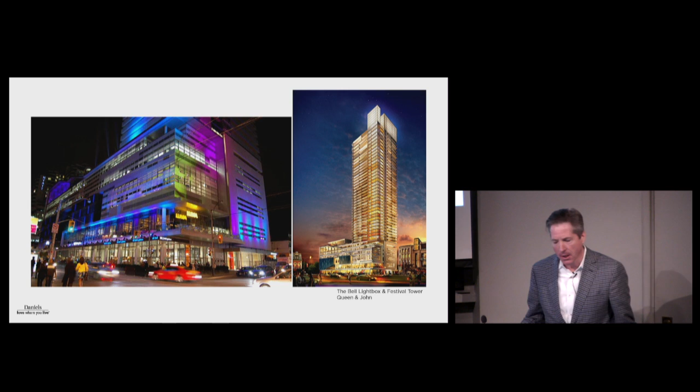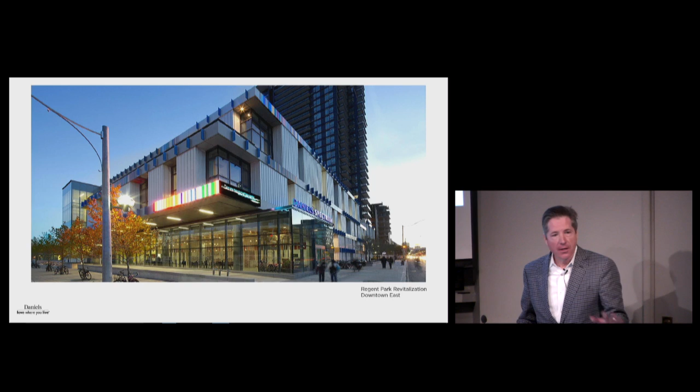But we're not here to talk about this today. We're here to talk about a very unique community that is actually under construction today. And we call it Daniels Waterfront City of the Arts.

As Peter mentioned earlier, we are adept and desirous of wanting to form relationships with Toronto's arts community, and that arts community can span a broad spectrum. As evidenced by TIFF Bell Lightbox being the film aspect, Daniels Spectrum, which I talked about, has a whole host of different arts and cultural organizations, a Center for Social Innovation. It's managed by Toronto's Artscape, which those of you who know Artscape know is the City of Toronto's arts provider - an amazing organization. So just to fast forward, we've done a number of significant communities in Toronto.

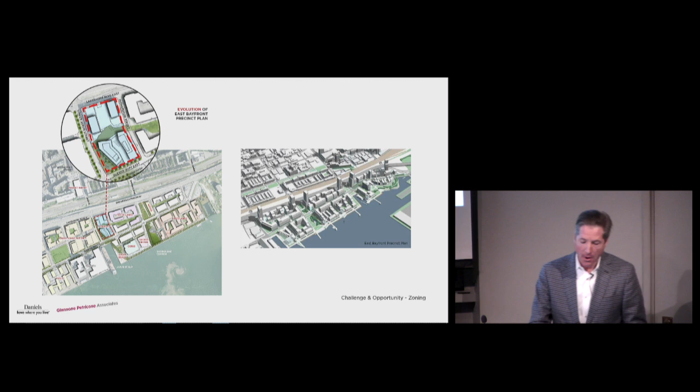Waterfront Toronto was charged with revitalizing the waterfront, and I think they've done an incredible job in terms of master planning, public engagement, and the amenity spaces they've created. This was on every single developer's radar, and we were fortunate enough to put our hands on 2 blocks, which you can see up here in the corner - a city block approximately 2.8 acres in size. To the north is Lakeshore Boulevard, to the south Queens Quay, Lower Jarvis to the west, and Richardson, a minor collector street. As you can see, it's a gateway to the East Bayfront community.

That's what was really interesting. Some of the younger audience members may know this as the former House of Government nightclub. So we were the people that took down the Government. What can I say - my kids were not thrilled, but you know.

It was interesting because the City of Toronto adopted a zoning bylaw - a lot of land consolidation led to the creation of Waterfront Toronto. The city created a zoning bylaw on the precinct plan around 2006, and that seemingly overnight granted what you see here today, save and except for our parcel. This was Waterfront Toronto's vision of the precinct plan - pretty cool and nifty stuff, but what does Waterfront Toronto know about developing, marketing units, selling, and talking about marketable density and different uses? So not surprisingly, everybody was upset. Some people thought the location of some buildings were improperly sited up against the Gardiner Expressway, a very difficult area to sell. Some landowners were very concerned about not enough density - go figure, overnight they get all this windfall - and so everybody appealed this to the board.

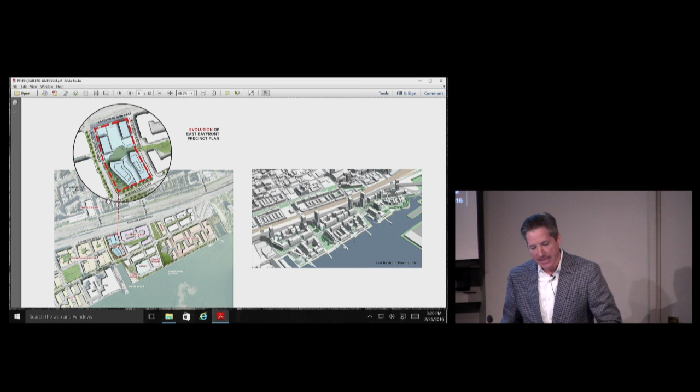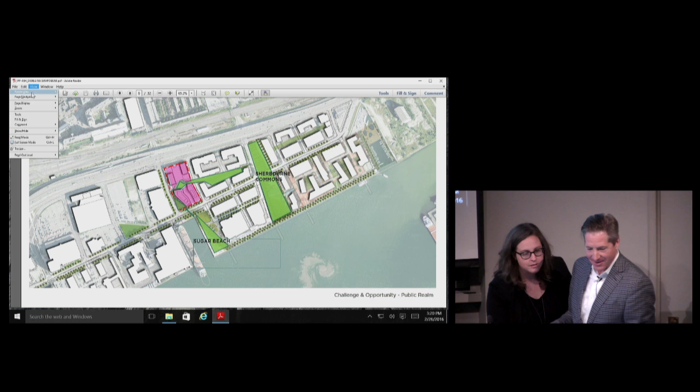Now I should clarify a couple of interesting notes. Those are our friends at Great Gulf. Great Gulf actually had land use approvals, and the reason they had them was because they did a purchase from Waterfront Toronto - in that case, Waterfront was a vendor. Ours was the first private sector acquisition, and that makes it notably different - a private sector purchase, where we then step into the position of these people who are clearly at the board.

So in the pink is our piece of land. As Peter alluded to in his presentation on the work he's done with Pier 27, which is just over here on this side - Redpath, a very significant 50-plus year industrial landowner, an existing operation with no intention to go anywhere. Go figure the business economics of tankers coming up through the St. Lawrence and coming in to unload cargo here. It's a historical operation, but they have no intention to leave, and it's a very significant footprint with a whole bunch of characterized compatibility concerns.

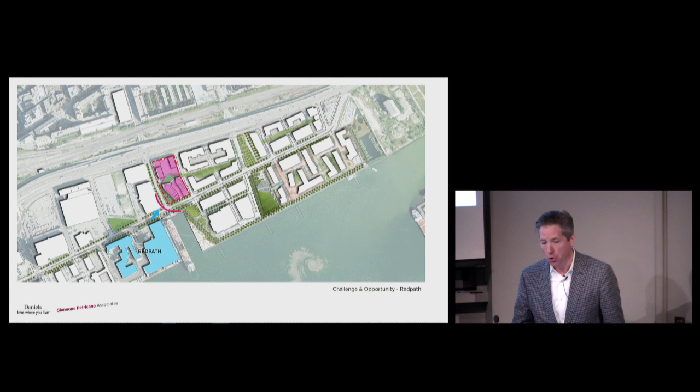So Redpath was taking everybody to the board. I don't need to tell you obviously the impact and how close our site is to them - they were a significant player in this whole dialogue. Obviously Waterfront Toronto were significant players, and the City of Toronto were very significant players. So to cut a very long story short, it took us probably about 2 to 2.5 years to negotiate with all the different stakeholders.

I think a notable issue was I had been traveling and had gone to Cape Town, South Africa, and was absolutely awestruck about their waterfront and how dynamic it is, with all the different uses that seemingly cohabitate there. You have a high-end hotel, where my daughter and I are actually staying, beautiful nightlife, restaurants, retail, residential, and not a minute's walk from this hotel, there's a dry dock with a massive tanker getting sandblasted. I won't speak to all the MOE criteria around that, but how fascinating from a pedestrian perspective to be able to see all these things happening.

So we came back and it just struck me, and our company has always had a desire to speak for ourselves. We don't necessarily do a lot of speaking through lawyers and planners and other experts. We have a really good sense about what we want to do, and we can sit with somebody and say, here is what we want to do, here's why we think it's a very good idea, what are the concerns, let's get into a dialogue. That's really what it's about.

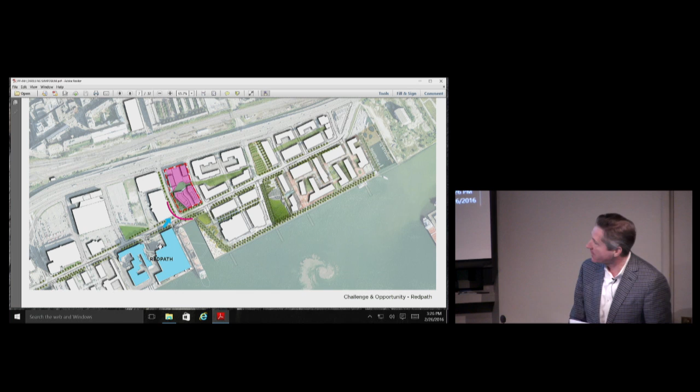Well, I mean, needless to say, I don't need this mic, right? Needless to say, we were delighted to be asked to be part of this venture.

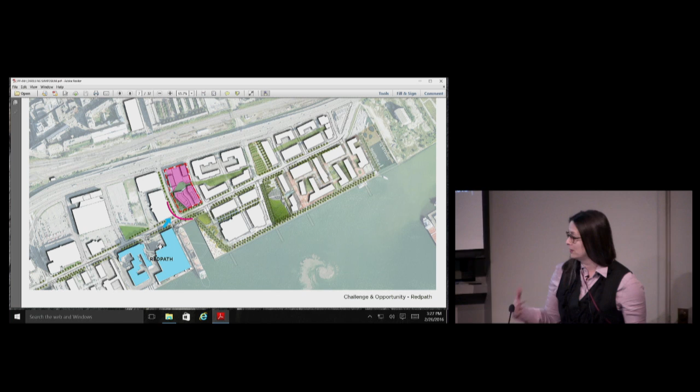We were one of a team, as Neil mentioned. Daniels was long into this process before we came on board and put together a team of designers and actual experts, including Raw to design the South Block, Claude Cormier for the landscape architecture, Ken Greenberg as a consultant to the entire urban strategy, and other consultants such as Novus, who put all of our schemes through a rigorous performance modeling program that significantly shaped our work, as you'll see in my discussion.

These were... untalked slides, Pina, sorry. Was it not? These were still Neil's slides that prompted you. You needed no prompting anyway to discuss those.

So when we were approached to work on this project and specifically to design the North Block, it actually is impossible to talk about the North Block without talking about the South, the extension of Sugar Beach, the inter-block connections, et cetera.

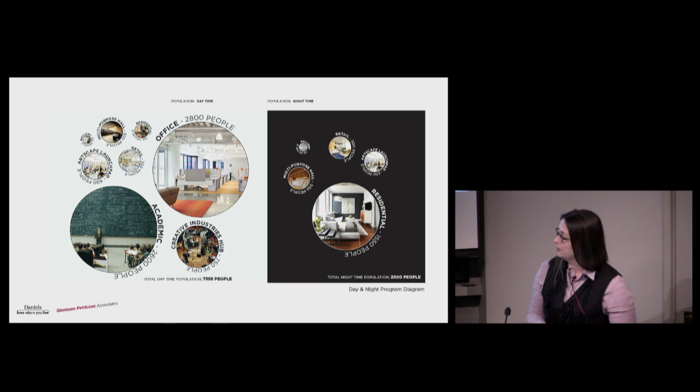You will see that this really is a project that is a definer, I hope, of intense mixed use, or what we call in the office true mixed use. We've been involved in a lot of mixed use projects, and often mixed use is quite limited to commercial at the base and residential above. We have been involved in other projects that are more daring, but maybe none as daring as this.

I say daring because when you are actually committed to a true mixed use that isn't just the slogan live, work, play, it's actually live, work, play, learn in this case, there is a whole reverberation of metrics and even mathematics that goes through the development model. So we were delighted to be part of this, and as architects really challenged, as many people in the audience who are architects or students of architecture know, usually the most innovative designs come from limitations or from such challenges.

The slide that's up right now is one we put together in our first presentation to the Waterfront Toronto Design Review panel, where we started to count, literally, the number of people that would be here during the day versus the number of people during night. A big problem that affects various pockets and neighborhoods in the city of Toronto, but maybe none like the waterfront, and specifically east of Yonge Street neighborhood, suffers from being this kind of nocturnal city or nocturnal neighborhood.

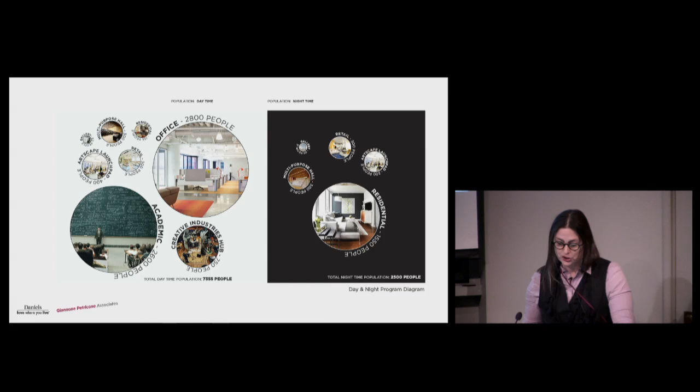It's really only through this kind of combination of programs that we could get these people here. And we like to think that it's in design and in the architecture that really allows a kind of urban and mostly social intensification to happen.

So when Peter says housing makes cities, I think that can be true for Toronto. I think it can be true perhaps only if we consider housing as an operation that is opportunistic, right? Opportunistic in a way that is a kind of excuse, maybe, to striate spaces at the ground.

So we are going to show you two high-rise residential buildings here, but with an intensity at grade that allows for a kind of social infrastructure that we think is key. We happen to be obsessed with this notion in our office, and we do many projects in the city that are what we call public interiors through restaurants and bars and hotels.

But this constant preoccupation of what it is like to live, and when we're talking about standards of dwelling, it's impossible to think of standards of dwelling without thinking of standards of living.

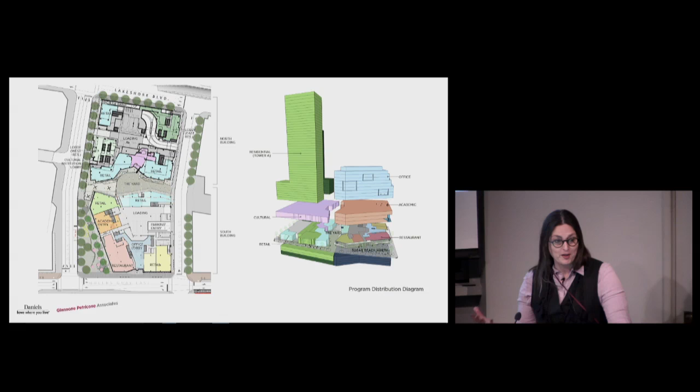And so this diagram here, just to be specific: this is the entire block. This is Queen's Quay. This is the south block, which is entirely commercial office and cultural program and retail program. This is the north block that we're talking about, and what we defined as the yard, which I'll get to in a minute. And this is just an exploded massing of the different programs that we have on this site.

On the south, there is a big academic program and the office component. I think what's here is the Artscape launch pad on this side. As Neil mentioned, there was an obligation not to have any residential units on this side.

On the north, then, it basically carried the load, so to speak, of residential units. There is another cultural, actually education, program here. And at the base we have a different scale of retail and a large collecting lobby for the institution that sits above.

And all in the green are the connections down to the street through the residential buildings.

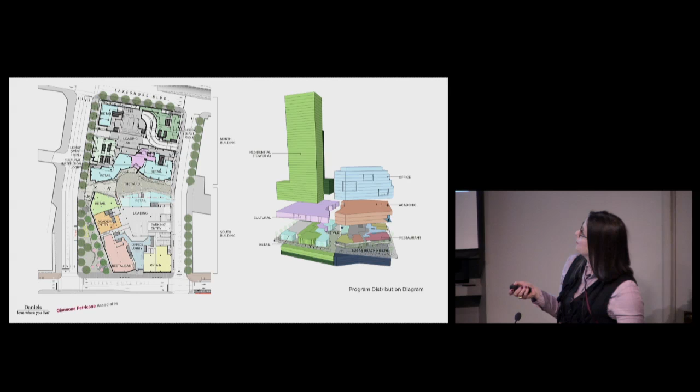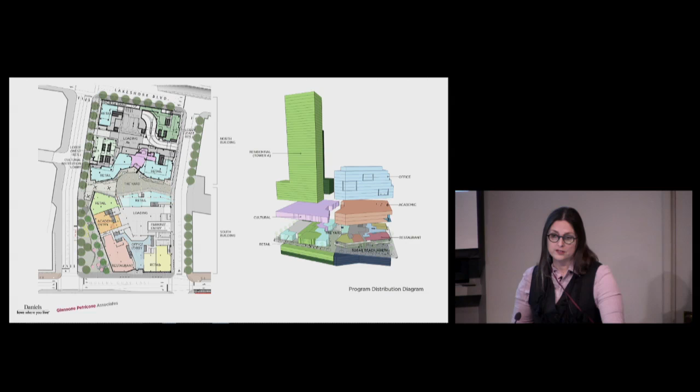This idea of a kind of conviviality of these programs, but not just the programs, but basically what the waterfront—and how it is currently striated with the still the vestige of its industrial use, mostly through Redpath—is a kind of richness, a texture that we really wanted to leverage and be part of, and almost heighten rather than take it as a kind of confrontation.

So just very quickly, there were the aspects that are shaping—before I get into these diagrams, coming to the waterfront, this side of Yonge Street already had these cultural programs that had emerged. There was the Corus Building, the George Brown College Building, there's that think tank, what is it called?

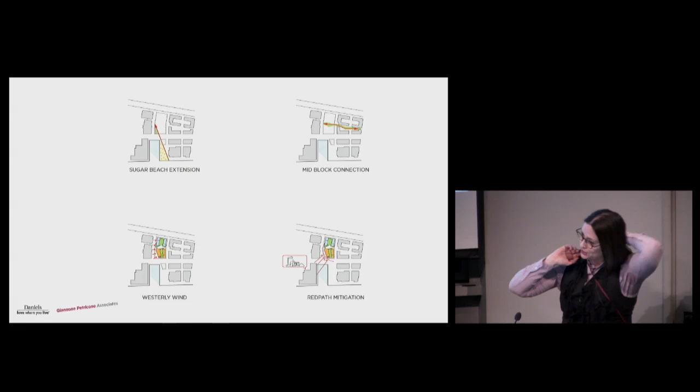Do you remember, Duncan? The Innovation Center that's on the boards. And so there are already these kind of magnets of cultural program existing in the neighborhood, and this actually works very well to tap into that.

Two things that we discovered as architects coming to this site. One is that the waterfront really does suffer to some extent with scale—potentially a kind of middle and large scale being tackled first, as it should be, but that fine-grain scale is yet to come, and it's ripe for that scale to come and intervene.

The second thing is that there is a microclimate—maybe not on a day like today where we have a bit of sun, but on a day like yesterday at the waterfront, it's quite inhospitable. As a pedestrian, especially even a cyclist, you could get blown off your bike in certain instances.

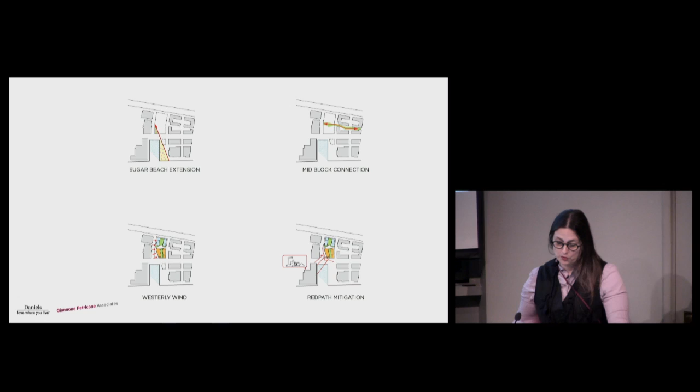So these two aspects of this particular site, and three when we include the nodes of culture, were really what drove our scheme. And actually, these diagrams explicitly show the big moves that shaped the project.

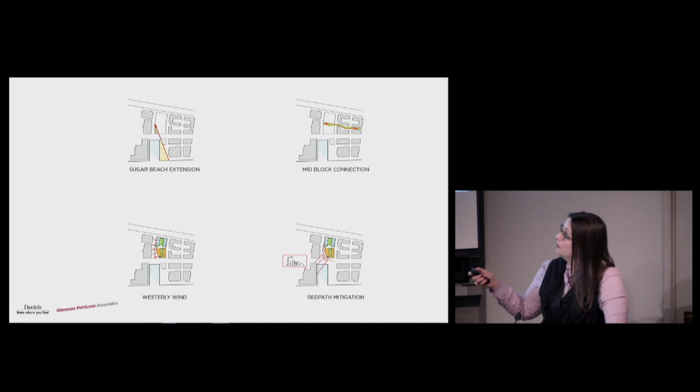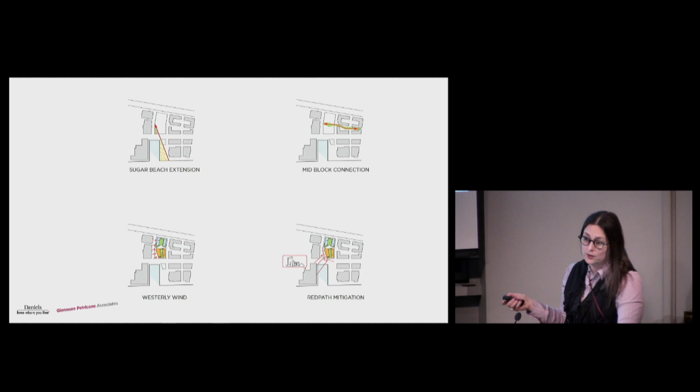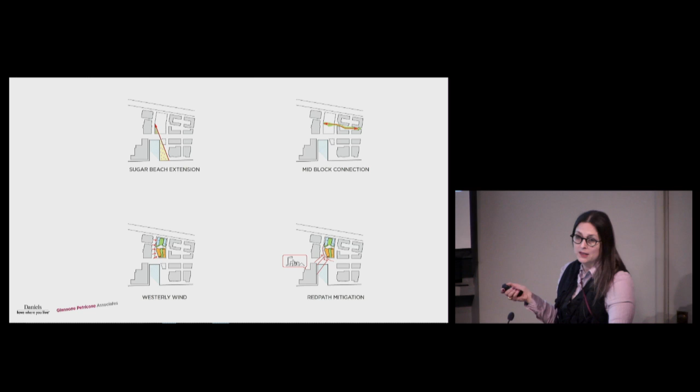So the first was the extension of Sugar Beach—Claude Cormier's intervention becomes quite literally an extension. The second, and actually quite significant for us, is the mid-block connection that was already programmed within the precinct plan. The westerly winds, which are already formidable, are then exacerbated by putting a 43-story tower in its path. And lastly, but not least, the proximity to Redpath and the mitigation we needed to accommodate there.

So again, these are challenges that we relish. We relish them because they provide resistance, frankly, to the work and to the design process.

So the first gesture is really to identify what we call the urban order versus the creative order—an idea that was necessary to develop a public space, but a textured space, textured insofar as its uses and occupation, first of all day and night, but also 12 months of the year. This is something Ken Greenberg was championing for this project with the city, and it was amazing.

One of the questions for the symposium really hits at these kinds of processes, where you can get the attention of decision makers by saying, if we do this as a kind of design gesture that may not fit within the official plan, we could get people here 12 months of the year, or we could have people here all day long—more people here during the day than at night.

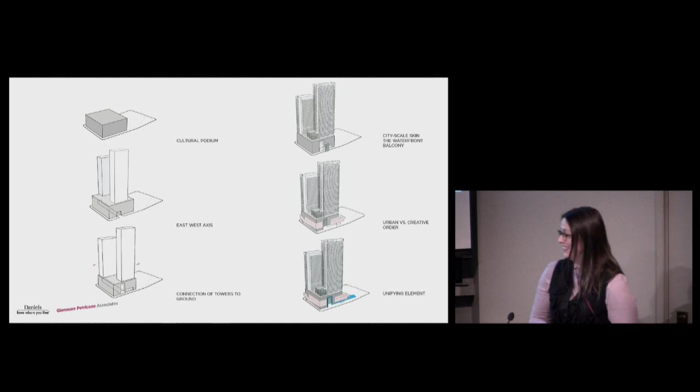We started with this cultural podium, as we call it, that was invested with programs that put so much pressure in our design on the metrics of the residential component. So when I say the residential component on the North Block is doing the heavy lifting, it meant that direction came down from Daniels one day to say, you know that super cool shape you made? Well, there's a directive to actually create these towers to be as simple, and the key word was efficient, as possible. Efficient in its floor plates and the location and size of core and how it connected with the podium, but also no jogs, no innies and outies, no pleats, no nothing.

We would come back and say, oh yes, absolutely, we understand, and then we would go like maybe a little shift, and they'd come back and slap our hand and say, no, you didn't hear us, we want it just rectangular. We appreciated so much that they were still letting us do this, because we understood, it took a couple of meetings, but we understood that for all of those people living in these towers to have an exceptional amenity in their immediate proximity, their dwelling life needed to include this. And the only way that could happen is with the numbers working, and the affordability of these units was key.

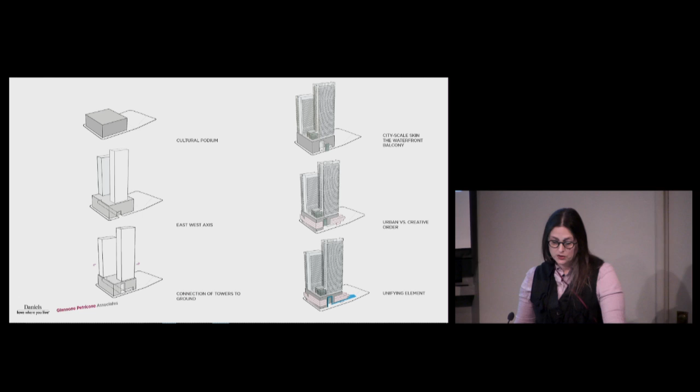So the scheme developed using the strategy of this cultural podium with the urban order and creative order towards the yard, and the staggered towers. We staggered the towers in order to create certain views and a kind of collapsing of views, and pulled the service corridor away from Lakeshore. There was always an intention that in the future, we hope in the near future, the Gardiner will come down, and we imagined a facade that would still be robust and appropriate when that happens.

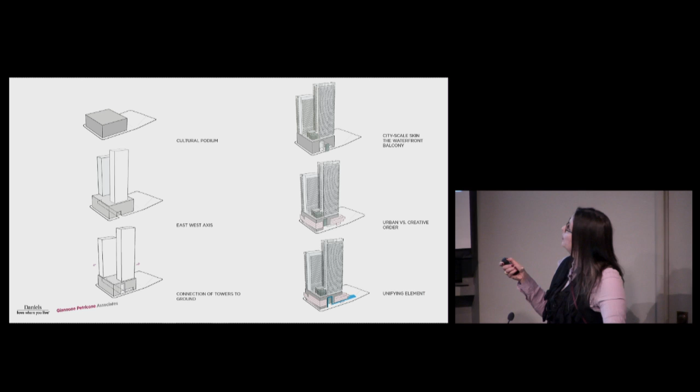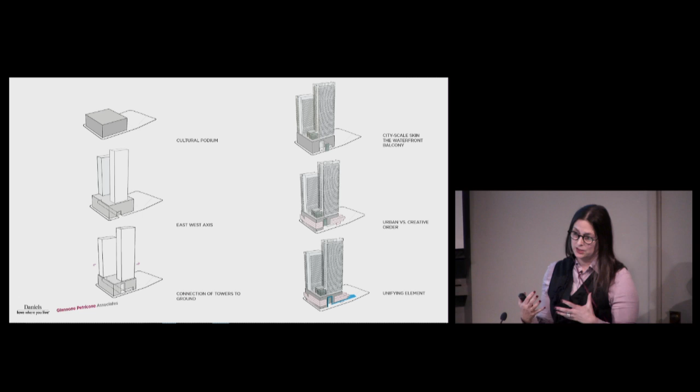The big gesture really happened at the urban scale, or city scale, where we had these rectilinear volumes, we had balconies, and it was at the level of the balcony that we provided expression. We challenged ourselves to come up with the most inexpensive way of modeling this rectilinear form, and we developed a frit pattern which unabashedly, in a two-dimensional way, tried to create a kind of optical illusion of movement and depth, but really it's just a ceramic frit on glass balconies.

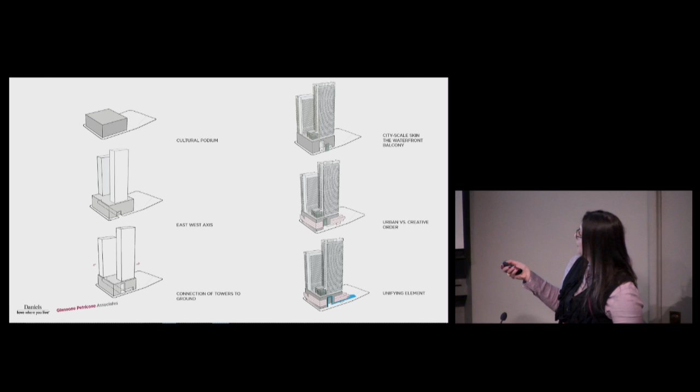This last element, which we call the unifying element, is a big canopy, that was first a result of putting the building through a performance process. The mitigation factors with Redpath really required that we dealt with not just noise but odor, and the building really works hard to use basic technologies to respond to those mitigating factors, rather than having to build a wall, as Peter did against Redpath. Again, with the hope of this idea of conviviality, much like the South African example, that Redpath and that industrial aspect of the site continues, and this is just layered on.

So the canopy is actually the greatest contributor to wind mitigation, and the tests included, as a pedestrian, what are the degrees of comfort? There are many kind of actual rankings they give in different spots of the site, and we were intent on providing the maximum comfort as a pedestrian in order for the space to be used, even on days like today.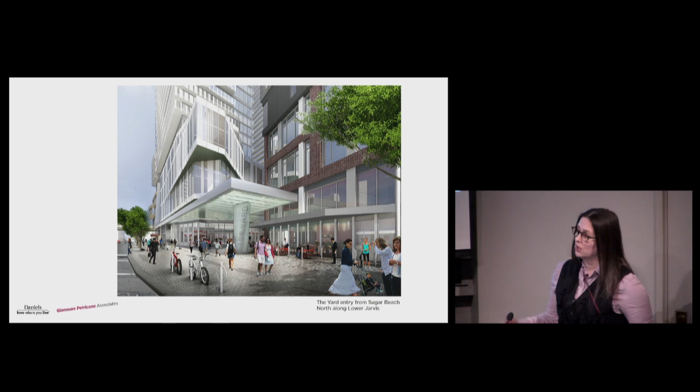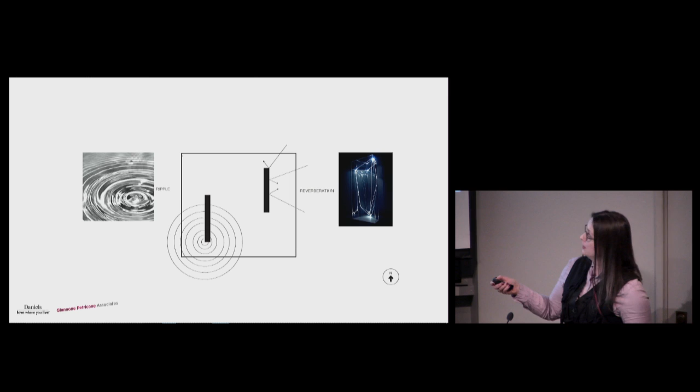So the strategy was to create, as I said, the ceramic frit. The westerly tower created a ripple, the easterly tower was reverberation. We say it's ripple like water, but really in the office we were so battling and wrestling with this issue of sound mitigation, the STC ratings, et cetera, that for us it's noise, waves, and reverberations, not water.

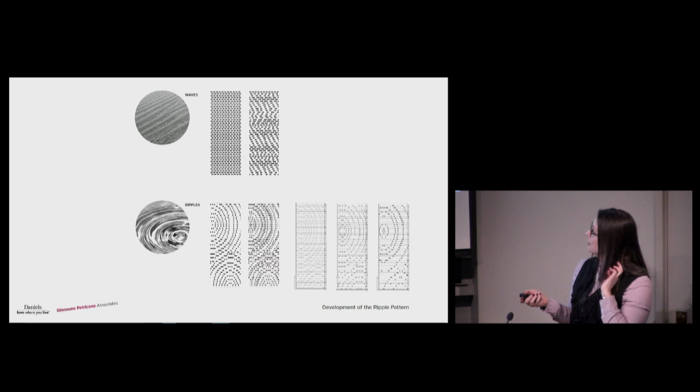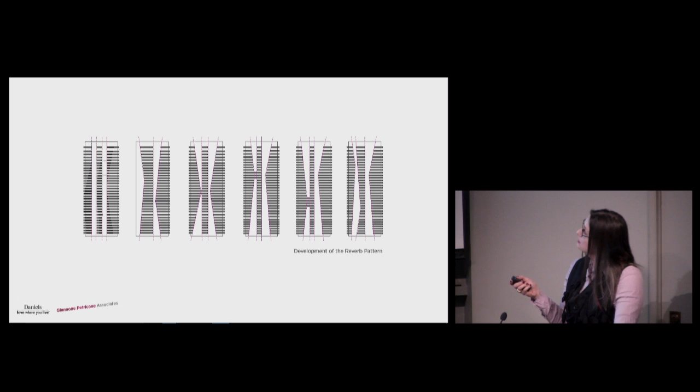And the frit, the studies of frit were exhaustive, and the layering, keeping in mind the price point, we developed a strategy of only 5 patterns, but in their recombination got a kind of depth and complexity. Similarly with the reverberation side, the east tower, these were not expressed as glass balconies, but patterned perforated metal balconies, which are actually the only thing cheaper than glass balconies. As the unit layouts developed, we developed this with gaps in the balconies, and ended up with 3 very basic types of balconies.

The balcony is maybe the first, I'd say preoccupation politely, but really a kind of obsession in the domestic project for us, and how it participates or extends that domestic unit. These are the three types that ultimately inform this project: the ceramic fritted bypass balcony, the perforated metal panel bypass balcony, and the clear glass panel, which is the most basic we could have.

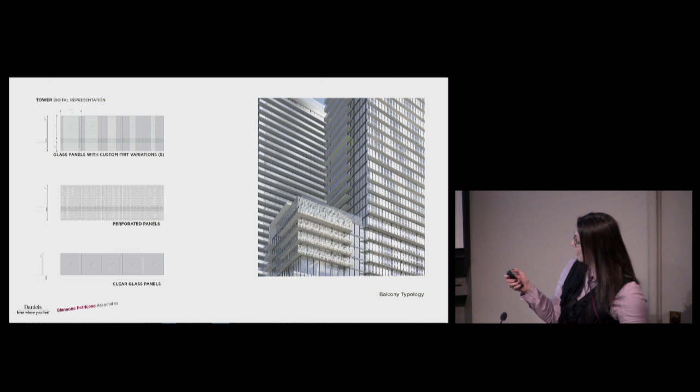The clear glass balcony happens on the inside, where the view is most controlled.

So in this idea of the balcony, just very quickly, some other projects we've been involved in that challenge us to really reconsider what the balcony gives and how it performs.

This is our contribution to the Regent Park Revitalization Project, where partway through the process, this building was full of balconies. The directive came down from TCHC and Daniels that we were to try to eliminate the balconies, and it actually developed a strategy that allowed a pushing out of living room spaces. We still maintained a very critical 40 to 60 vision glass to solid ratio that is critical for the energy performance of this building and all TCHC buildings.

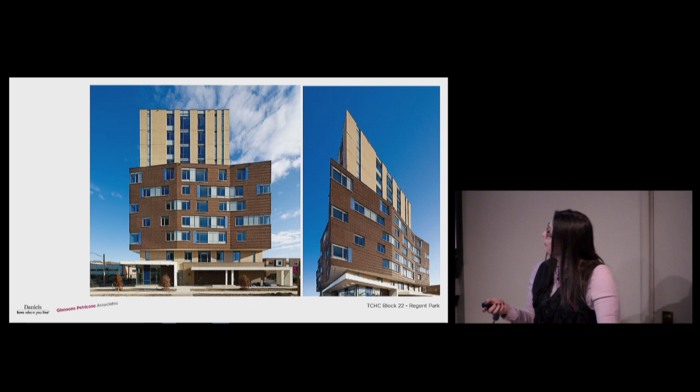There was no easy way to project balconies, so again, this was a limitation that we embraced and developed extra deep strategies there. Another project, very similar to this one, is City of the Arts.

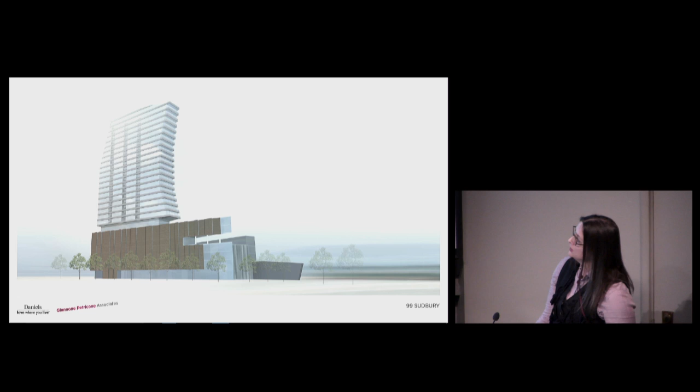This is at 99 Sudbury. It's at the railway line here, and there is actually an award-winning initiative by the City of Toronto for the rail path, the West End rail path. It was actually planned to end at our building, at this site here. We developed this robust and layered podium complete with a crash wall that goes all the way along, and raised the rail path 4.5 meters.

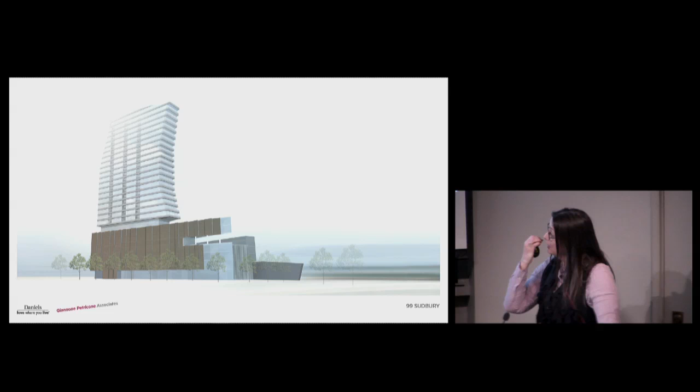It's a similar, what we call, opportunistic strategy with the limitations. This had more serious noise limitations from that rail line, and you see here that our first gesture is to recess the balconies and achieve pretty significant STC ratings. At the same time, as you trickle down through the building, there is this layered base that helps to do that.

And this is a view of the site. There's the crash wall and the raised path.

Lastly, a different condominium building. We call these Thing 1 and Thing 2. It's a completely different kind of idea of the balcony, but consistent with the kind of tectonic research that goes into the piece itself.

Obviously this is a highly formal strategy where the ribbon-like effect of the balcony is critical, and so that is maintained. However, we're actually overlapping: a perforated metal comes up two-thirds of the way, and clear glass comes up the last third. The idea is that it really is the object in the field.

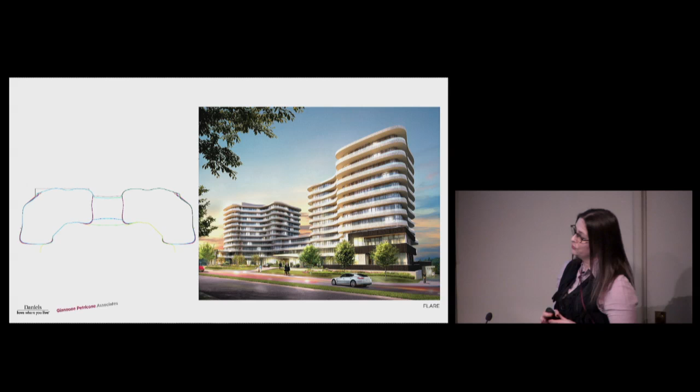The views are all 360, and so if you are sitting inside your unit, you still see through above the perforated metal. But really the perforated metal is amazing for keeping all of the garbage and tchotchkes out of view, as well as giving a sense of containment, especially when you go up.

So back to City of the Arts, it really is this ground plane - the yard, as Ralph Giannone, my partner and husband, coined the phrase. It's not a courtyard, we kept saying, but really it is a yard, borrowing from the industrial version for its productivity, but not just that kind of productivity - really a cultural, educational productivity given the programs that surround it.

So the yard is really an experiment of what the City of Toronto refers to as POPs, which is privately owned public space. And we love POPs - this is a poster child, we hope, for POPs. Because when there is a privately owned public space, it makes so many things easier, like having events in this space does not require certain kinds of licensing, doesn't require any kind of procedure to do that.

It's really the interested parties that surround and own that place that could actually control those aspects, and it really helps with design elements as well, like the flushness of paving, etc.

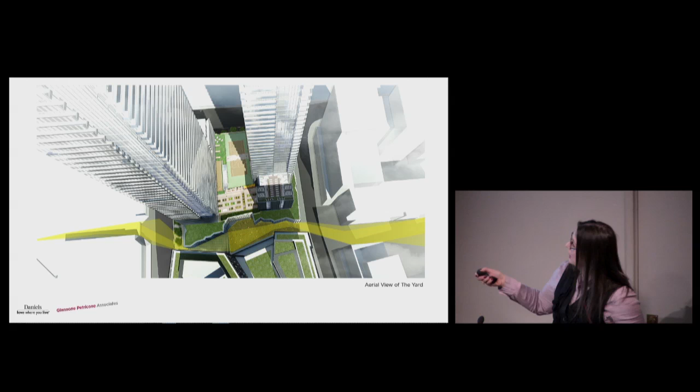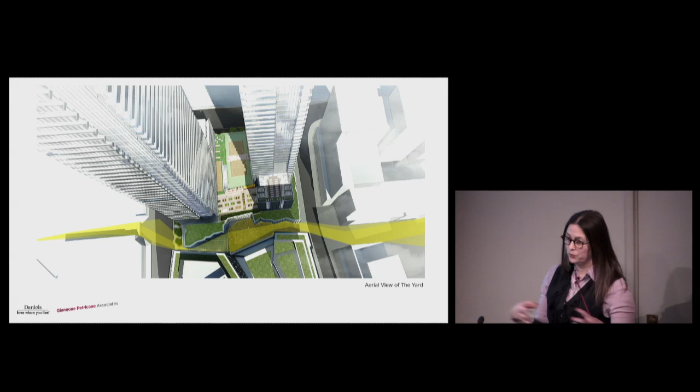So the yard itself, what we see here is the large canopy for wind mitigation, and this is an amenity that happens to serve only the condominiums, raised up. That's the yard below. This is the south building, and this is the connection to the waterfront precinct plan through that mid-block.

So a lot of thought went into the yard, and a lot of discussions about really what it is. It's not wide enough to be a courtyard, it's not meant to be sun-drenched. It really is meant to be a yard.

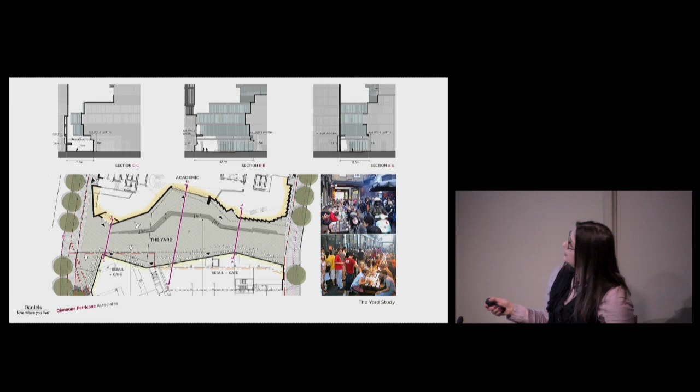And we looked at various examples, mostly in the UK and actually in Germany. These are both Stone Road from London, and the sort of rigorous development of the innies and outies in terms of what happens to that section.

Claude Cormier actually has a great idea of putting catenary lights across. The advantage of the yard is that it's relatively narrow, and these catenary lights could span and be hung between those buildings, so at night it literally creates a kind of ceiling to the space.

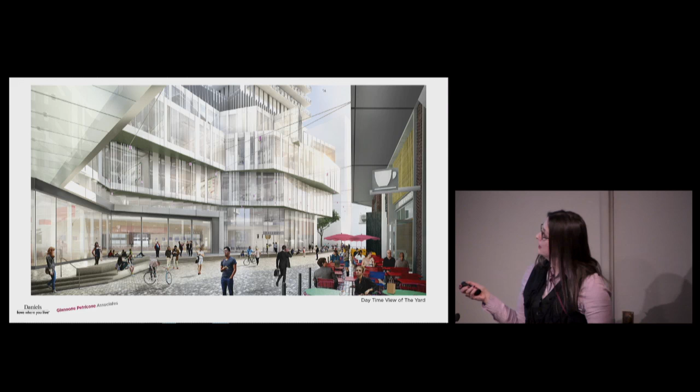This is a view of the south side, which has much smaller retail offerings. On the north side, there's the large lobby for the education, or institutional, component above, and then larger retail spaces that could be a gallery, a restaurant, things like that.

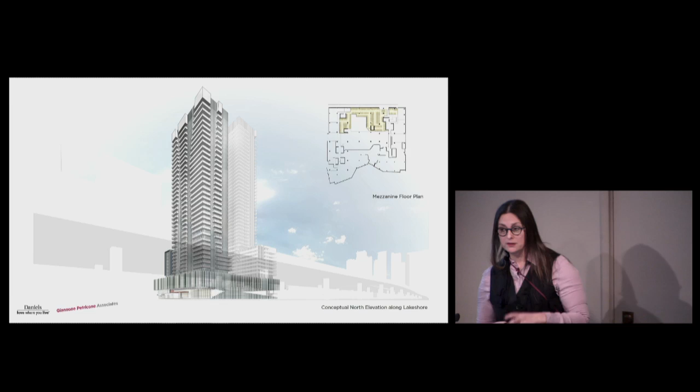This is just another view. And from the north, the lakeshore side, there's an interesting exercise in that we wanted to at least approach the new City of Toronto standards for accommodating bicycle storage. We're very proud to say that there's 899 bicycles that can be stored here. This is the plan of the bicycle storage and the ramp that takes you up.

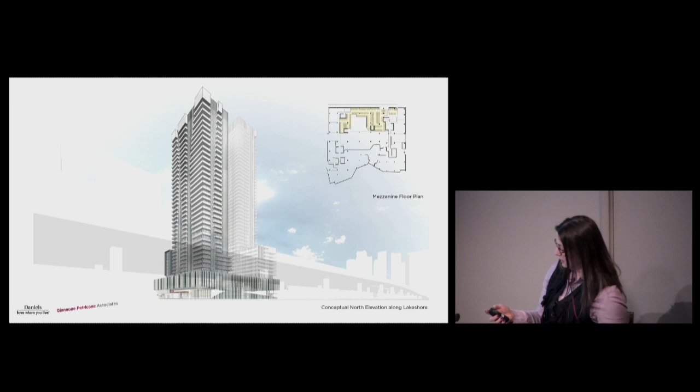This is the lakeshore facade that we're seeing here, and the Gardiner that passes through, which in itself has an extraordinary view - this is Sugar Beach North, adjacent to that, and that's just a final view.

Pina, maybe it was intentional or unintentional, but there was quite an emphasis on the cheapness of the towers. I know, I'm hurting here, Pina. Did I ever use the word cheap? Not cheap, no, more the kind of inexpensive. You were projecting, hon, that everything had to be cheap. So how's that for you, Niall, to hear this, that you're the one saying it should be less? I'm in all jest. So let's talk about that.

Yeah, so as I mentioned, there was a hard-fought negotiation with Redpath and Waterfront Toronto and the City of Toronto. There were very definite reduced footprints of the residential component given, so that was an economic challenge that we had to face.

In terms of the embedded art uses, part of our business formula is to be able to approach them with a below-market component, and so that has to be subsidized from somewhere. Having said that, never once do we want to sacrifice the buildings that we are collectively creating. We always want to be able to come and be very proud and walk through and constantly learn.

We've had our challenges with some of the glass issues, like a lot of other builders as well. And so all these things combined with wanting to create a really eloquent podium expression and tower buildings on top of these podiums that we don't think necessarily needs a treatment that has been characterized by lots of other buildings. And so it was a challenge - a challenge to Pina and to her team.